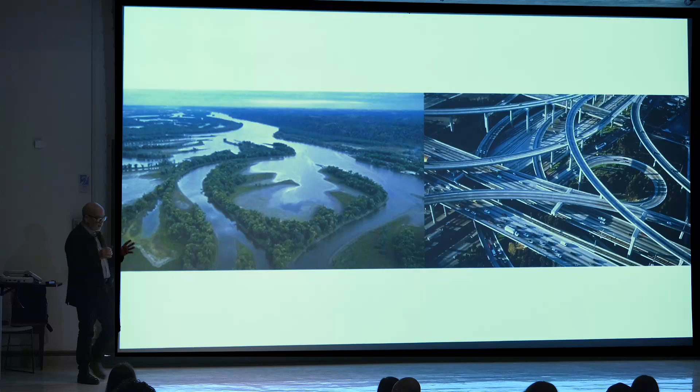I've always been interested in natural landscapes, but I find that most of our work today is less about natural landscapes and more about man-made landscapes. I lived for a bit in LA, and it was a very interesting place to experience for a number of years. But this dialectic between the natural and the man-made is something I think about with New Orleans, and when I think about its longevity over time.

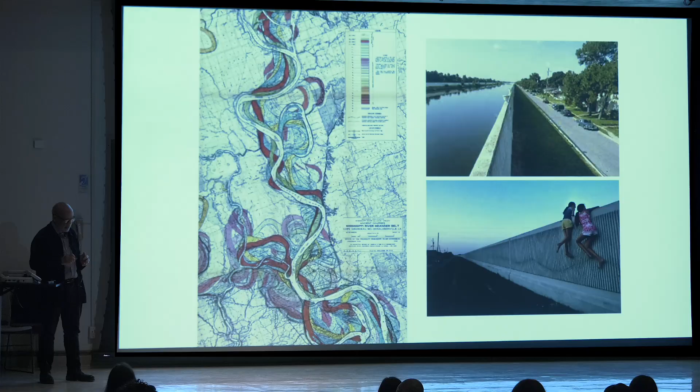New Orleans was sited precisely because of its location on the Mississippi River. And since its founding, given the tenuous relationship between the city, the river, and the Gulf Coast, we've been working quite consciously to cut ourselves off from the natural landscape. You can see in the images flood walls built by the Corps of Engineers—we've essentially walled off the city from the river, the lake, and the natural landscape. This idea of protection and refuge from the natural landscape is of interest to me.

But in addition to the consideration of landscape—I don't know if this mic is going to keep going on and off, I can speak loudly. Yeah, that works, speaking loudly. Why don't I just speak up? Is that fine in the back?

Okay, great. So again, a more personal kind of journey or set of interests. Spending time out in California meant I was able to visit a lot of the land art installations out in the West. I've always been interested in art in the landscape. I had a chance to spend the night at the Lightning Field and visit Sun Tunnels in the plateaus.

What is really powerful about this work, and what I think ties it to architecture, is that it's really about experience. Unfortunately I wasn't there when lightning struck at Lightning Field, but nonetheless the presence of that art in the landscape was incredibly powerful, as is Sun Tunnels when the sun sets or rises and you get the markings through. This idea that art and architecture is about experience is fundamental to my interest in it and the way I see the work.

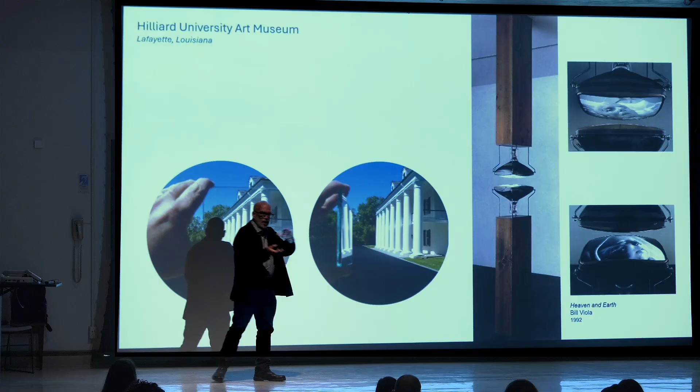Around the same time, I had visited a Bill Viola installation, and the power of that particular installation—Bill Viola's newborn on one image and his mother on her deathbed on the other. The two screens are so close that you can't see the images simultaneously; they're facing one another. Except for the fact that there's always the reflection of the other image superimposed.

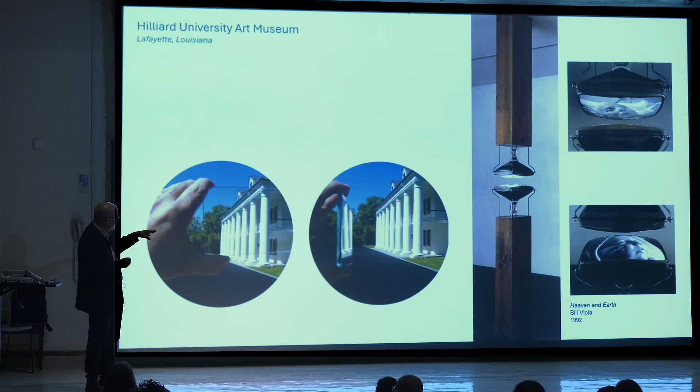This dialogue between time—he labeled it heaven and earth, I think of it as past and future, or past and present—was something we were interested in advancing in this new museum project. We were building it separate; it wasn't an addition, it was a separate art pavilion. But the entire facade, whether vision glass or spandrel glass, works to reflect the old museum, the history of the site, into the facade of the new. This dialogue between past, present, and future is of particular interest.

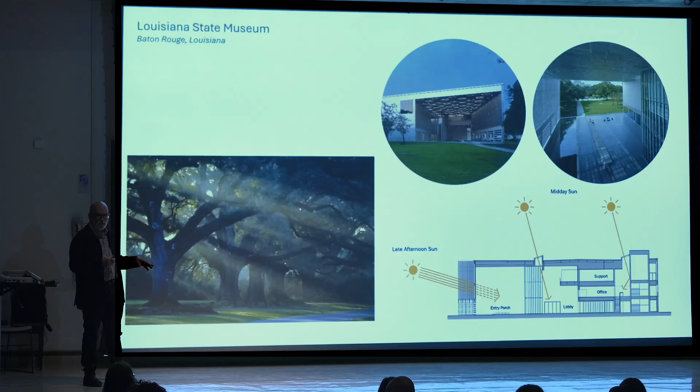The contextual, vernacular architecture of the South is also a jumping-off point—here, the way oak trees filter light across a site. We developed for the State Museum a large entry porch that's carved in rather than added onto the building, with a reflecting pool that reflects the state capitol in its north-facing window. As a porch, it's not outside, it's not inside—it's this in-between transition or threshold, but it also operates as a social space.

At 930 Poydras, we were doing our first residential apartment tower, and we were trying to determine how we could make an apartment building—which tends to be much more private, people get in elevators, go up to their floor, and go into their unit—create an opportunity for interaction between residents. So we looked at the French Quarter and its courtyard spaces shared by residents, where you'll bump into your neighbor entering, exiting, or using the space. It's a social instigator.

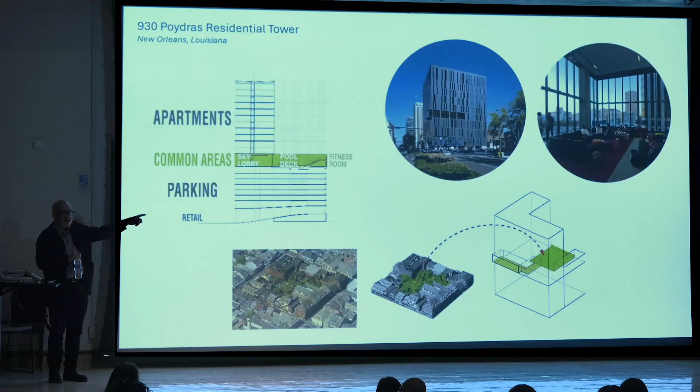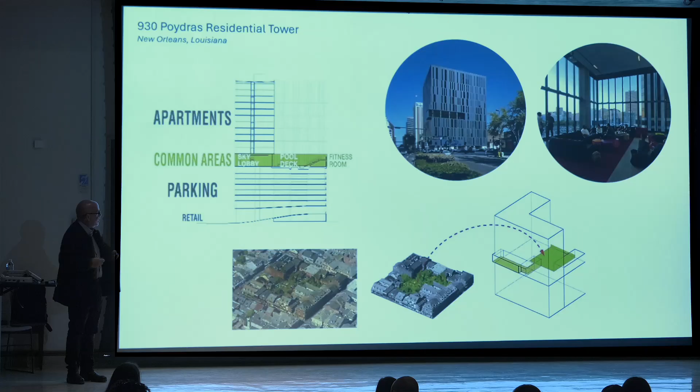Here at 930, we force people to get out of an elevator that only goes from the ground floor to the 9th floor. You get out, move through this sky lobby, and the chance of meeting your neighbor is enhanced by bumping into people as you walk through. Residents use it as an extension of their living room, for coffee and so on, and it becomes this marker in the sky, recreating the social space of a French Quarter courtyard—though it has nothing to do with its style. It's about thinking how spaces are used, and creating the set of experiences that drive the work.

I'm going to talk a little about our practice around four themes. We work to make sure they're present in all the work, but obviously the dials get turned based on the climate, the client, budgets, sustainability, and program.

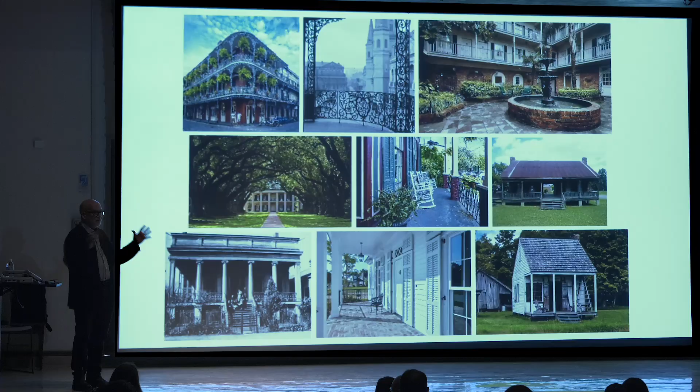I'm going to start with place. You've already seen some of these slides. We are in a set of spaces that are incredibly powerful, and I think every place has equal value to contribute—so keep your eyes open and learn from the history of a place. I love this quote by Faulkner: 'The past is never dead. In fact, it's not even past.' There's this continuity in what we do.

A friend quoted me a joke he tells about New Orleans: how many New Orleanians does it take to change a light bulb? Three. One to change the bulb, and two to reminisce about how wonderful the old bulb was.

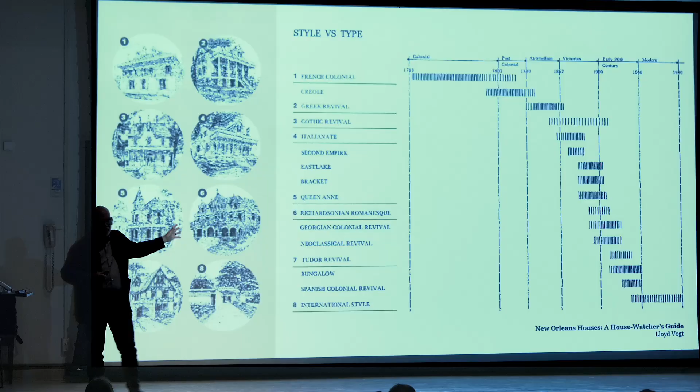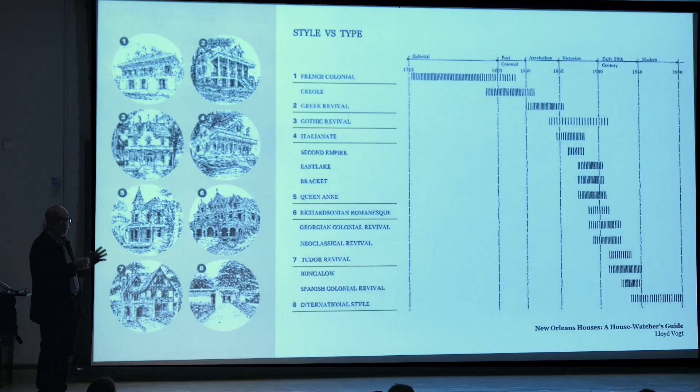So there's this sense on the part of the public that architecture in New Orleans is going to look and feel like New Orleans. Well, we think of it less about how it looks and more about how it feels and what's the experience of the place. Because styles change, types don't necessarily change. If there was a house built in the 18th century in New Orleans versus one built in the 19th century, much of it would be similar, but it would look and feel different. Styles change. So how do we fit into that continuum, working in a place?

Now, this is a hotel that we renovated, this existing building, 1920s. This was a parking lot. This is also a 1920s little garage that was built around the same time as part of it. This was a parking lot, and then we had these 19th century buildings as part of the site.

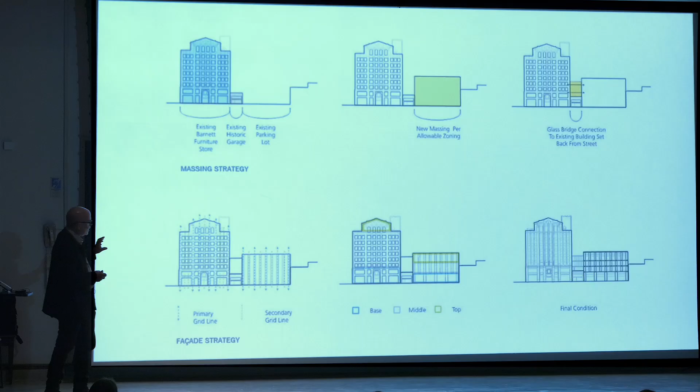So obviously we're not going to match one or the other. This is about how do you do a background building that has the quality of adding to a historic environment without replicating it. A lot of it's understanding strategies of scale, proportion, massing, how we can relate to the context without overpowering it. So you get to this wing of the building, the main check-in is here, and we have this bridge that kind of tucks behind.

In a completely different context, 12 years ago, we were invited to a competition for a museum in Greenwich, Connecticut. Here you can see it's on the I-95 corridor right at the harbor. The town of Greenwich is just up the road here.

But the context was one where the program was a major driver, right? We had a museum that wasn't just an art museum, it was an art and science museum. That had particular resonance for us, this notion that art and science in the Smithsonians are collected in different buildings, whereas in this building it was all under one roof.

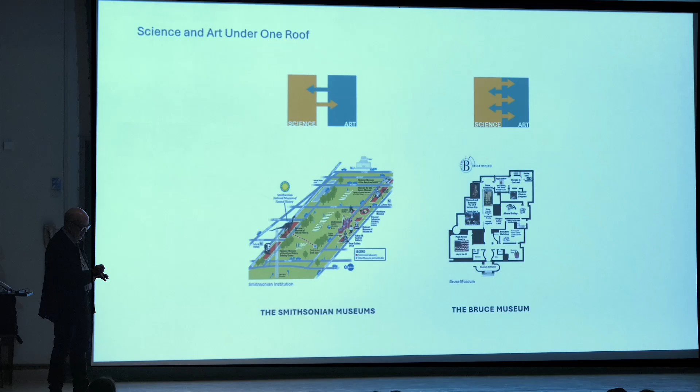When we started the project, we asked the director to tell us a little bit about the Bruce. What does the Bruce mean? He said, well, it's the only place where you can see a raccoon and a Rembrandt under the same roof. We thought that was a funny and interesting way to think about a museum.

What they're able to do is have simultaneous shows where an art show might work to supplement and build on an exhibition that's about science. So this dialogue between art and science, so that they're inseparable, was part of the project.

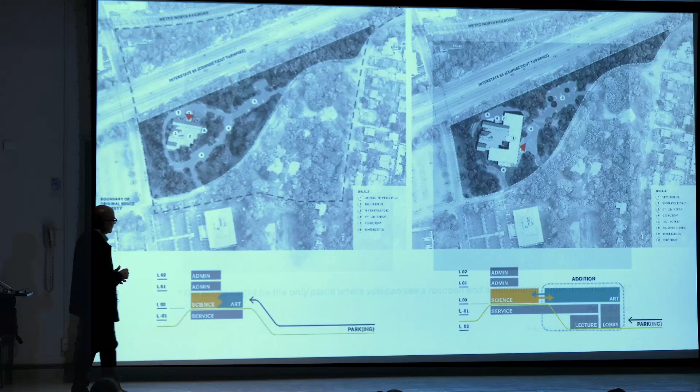The original museum was this house that was deeded to the town right around 1910, built in the 1890s. It had been expanded. The entrance was to the north on top of the hill, you can kind of see it here. The galleries were—the entrance was at the top of the hill, 25 feet above where people parked.

So it's kind of hidden away. When we expanded and doubled the size of the footprint with the new galleries and service, it naturally went out over the hillside and dropped down. So we were able to essentially, with the reworked parking, have a front door that was part of the park and part of the community.

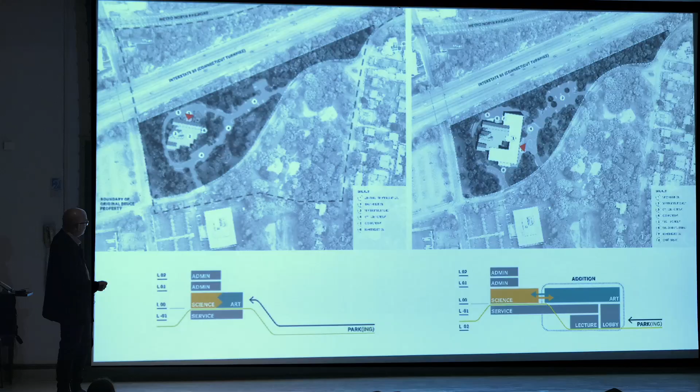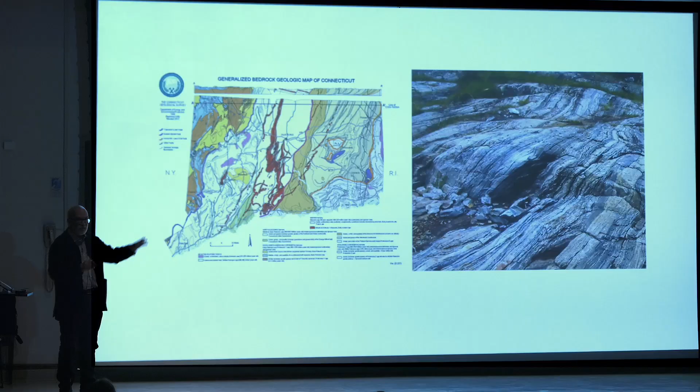We were inspired by the stone of the original house, the Second Empire sort of Victorian house, but also by the stone outcroppings on the site. This post-glacial scouring of the Connecticut landscape leaves rock outcroppings all over, and it was a really powerful condition of the site. So we were asked to think about the project in more than one way.

Stone was a theme, and we decided to develop two strategies. One, there are quarries up and down the Connecticut coast, so quarry carving—kind of subtracting in the manner of a quarry—was one option. The other was stacking, the accretion of building stone walls, and in this case lace walls were built where there was a lot of air and openness in between.

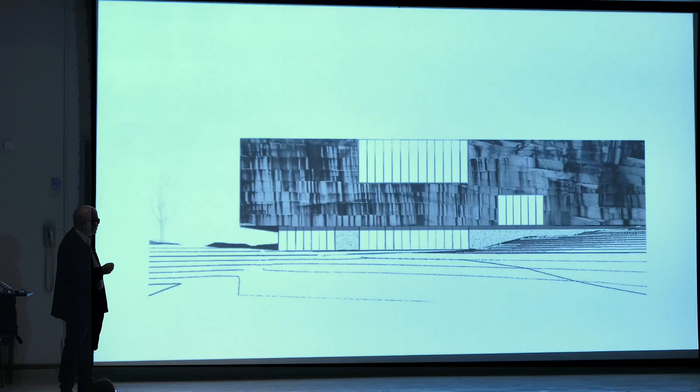So this was an operation we shared with the client, about going from quarry and then introducing lace. This is the entry sequence through the project. What happens at night is when lace goes from day to night, it becomes like a scrim.

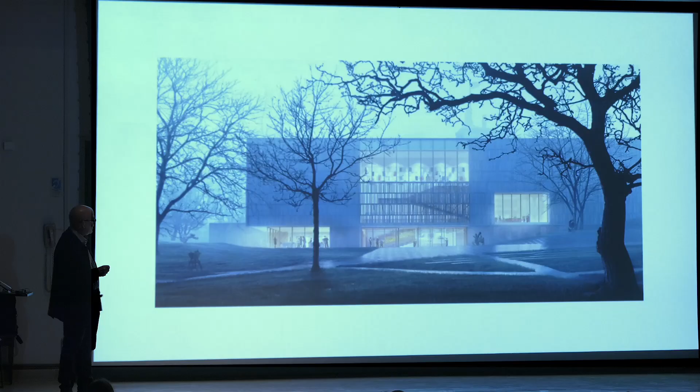And so you see through it and into it. This is the project that was nearing completion in the snow. When you're from New Orleans, you always show a snow shot if you have one, because we never get it. It was just amazing to see.

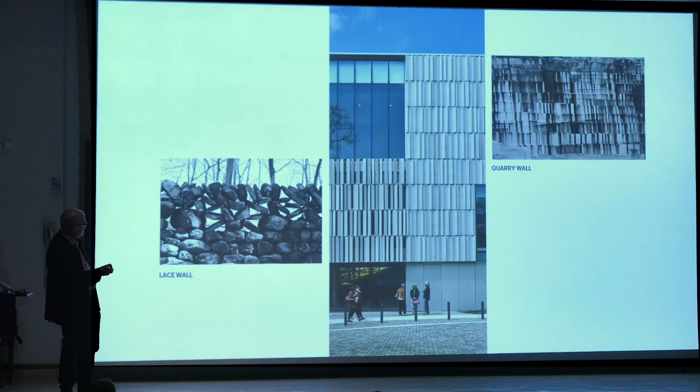But here you can kind of see the articulation. We developed a strategy where the precast wall of the quarry breaks apart and becomes a set of sticks that run in front of the curtain wall here, representing lace. But at night, as I said, it sort of transforms into something different. At night, you also see through the building.

And here, the design proposal we had captured a courtyard between the original building, or the original museum, and our addition. And so it becomes this diorama, this kind of site relic that we pull through and have an opportunity to interpret as a captured landscape.

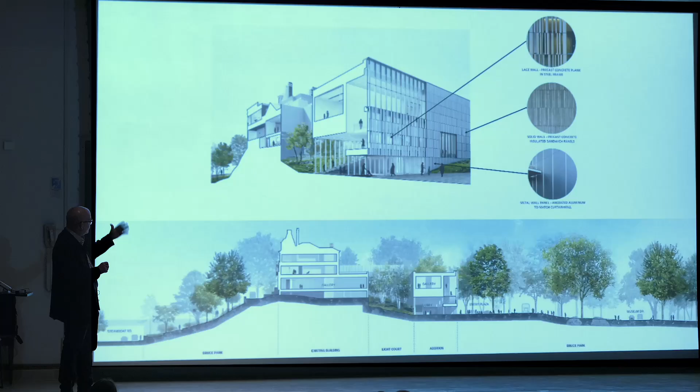We worked with Reed Hilderbrand out of Cambridge, terrific landscape architects that helped us realize this. And when you look on the inside, you can kind of see the corten steps and the stone outcroppings and the aspens that'll grow and become this intense landscape. But also a landscape that you're in between. So you have a landscape on one side, landscape on the outside.

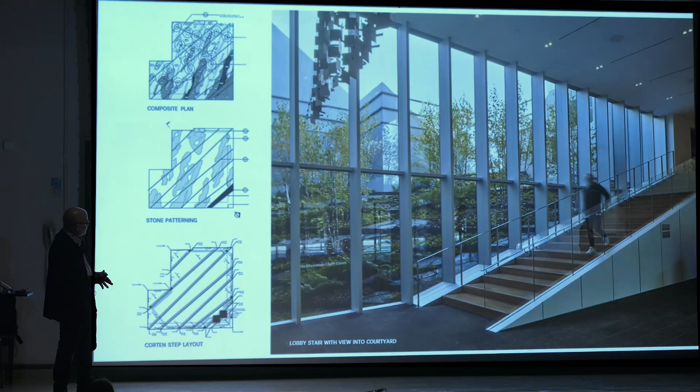This space of gathering almost feels like it's an outside and inside space. The stair that we developed works its way up following the slope of the courtyard, which was what we found on the site at the edge of the hill.

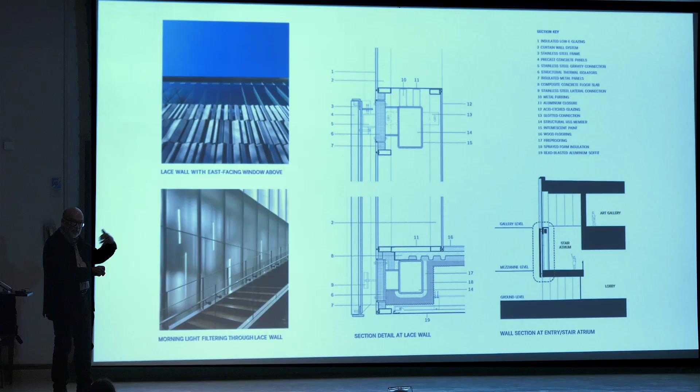And then on the outside, this lace wall starts to operate in a way where it literally allows light to hit the frosted glass on the inside of the stair and become a light fixture that kind of dances over the course of the day. So here's the approach from the park and how we manipulated the precast to achieve that effect.

So when we talk about performance and resilience, we talk as much about building performance, but also this idea of social resilience and sustainability. When we started the practice, it's one of the first projects I worked on. I was trained at the time that we were very focused on climate. It was just after the first Earth Days.

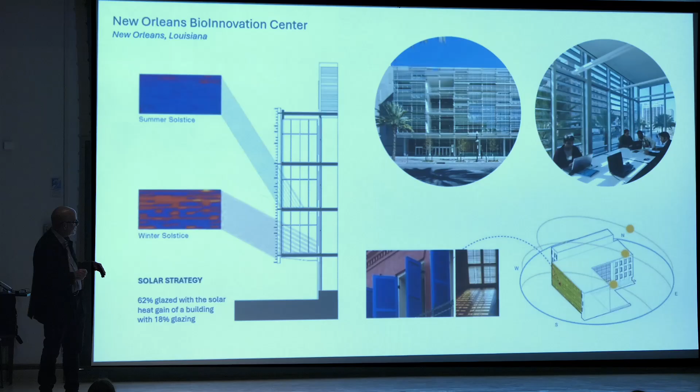But what we were doing then was essentially intuitive design that made sense given certain climatic strategies. What we do now is we use resources, use evidence-based design. I'm sure you're getting this in school right now. Ways in which you can, and for us, increase the performance of our buildings by doing the kind of analysis and research and modeling of the work early in the design phases. And so here, the strategy of using a set of shutters is similar to the way in which shutters operate as fins that protect and shade the glass, allowing us to be much more intentional about decision making on projects.

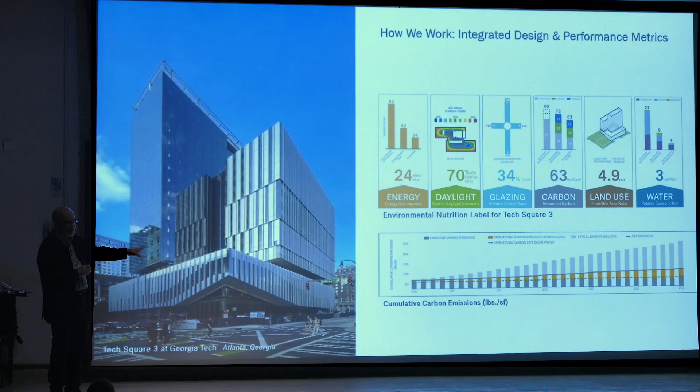Z. Smith, our Director of Sustainability, has developed this nutrition label for our buildings. This is done early in the process. He assesses things like energy, daylight, glazing, carbon, land use, and water. And so we work to understand how those are improving in measure so that we can deal with this climate crisis in a positive way.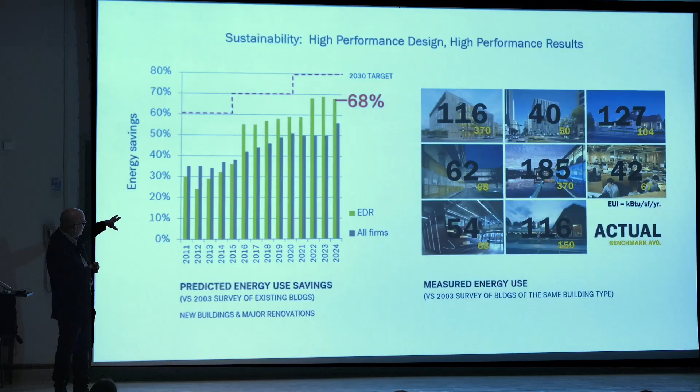So our buildings are performing. We've done a lot of work measuring them early, but then measuring them later. And so we go back and do post-occupancy reviews of the projects, and those have been foundational in helping us. You can kind of see the green line. When we started reporting for 2030, we were down low. As we started to do this research, we were able to significantly increase it.

And so we fund a research fellowship in the studio where we hire two fellows a year, one for the summer and one for the year, to focus on different interests of the firm, of the practice. Building performance, resilience, you kind of see them through here. Those fellows are not working on projects, they're not billable to things, but they are working in the studio, doing their research work, and giving talks to the entire studio and assisting people in the work and the projects. And it's been huge in the way in which we've transformed the practice.

So from the first work that we did, establishing an action plan, to being able to then incorporate it in buildings has been critical. And I think it's one of the unique things in the practice, but one that has been a huge investment that pays off significantly.

This is a project that we did in downtown Charlottesville. Charlottesville has a pedestrian mall, kind of like Denver's, but a smaller scale, with 2- and 3-story buildings on the mall that then, as you get into the city, begins to step up. The hillside rises, and the scale of buildings starts to rise outside. So there was a zoning code that we had to conform to in terms of height.

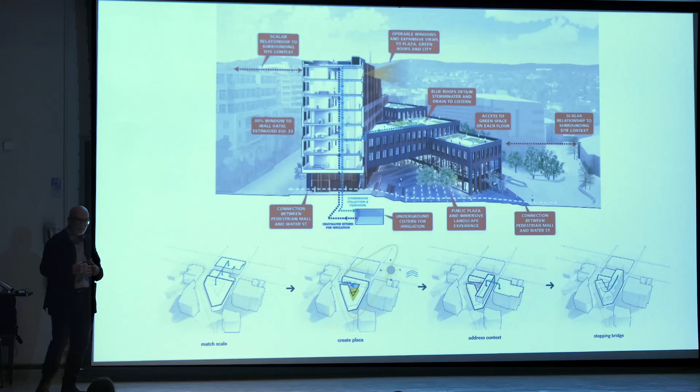Our strategy started by acknowledging the height of the district and then the adjacent context, to develop a step form that takes advantage of outdoor spaces on rooftops and collecting water, and provides great spaces for office users. This has yielded a project that's LEED Platinum, 99% of the rain harvested, and significant energy performance.

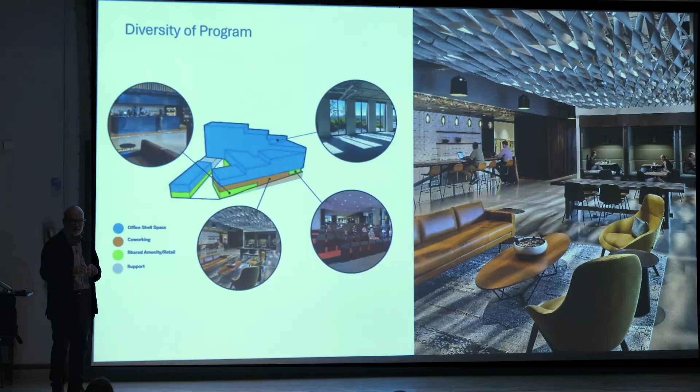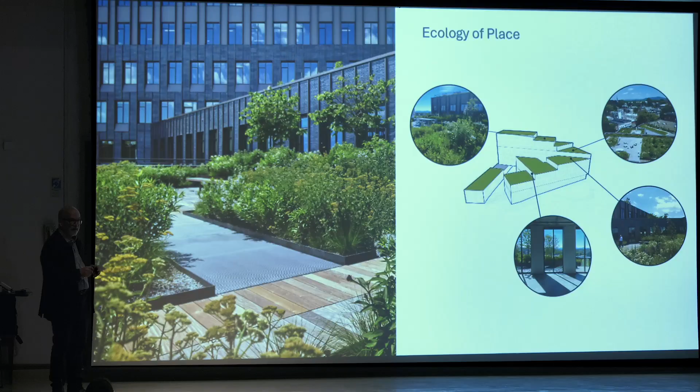But more than that, it's really the diversity of the program that contributes. It's a chance to really build community. We worked with the developer to conceptualize opportunities for different program elements to be distributed through the project. This ecology aspect of rooftop gardens, and what they provide in terms of health and welfare for the users of the building, and then connections throughout.

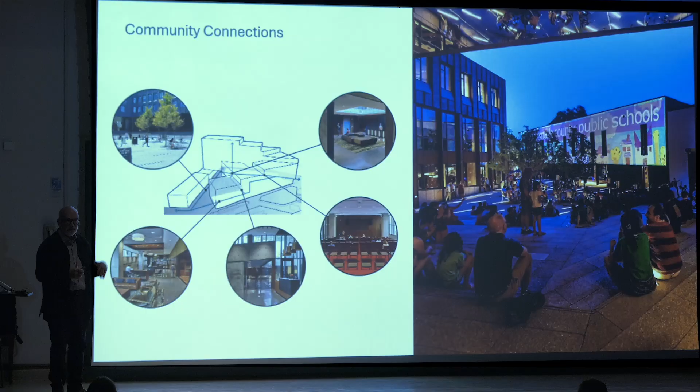So we carved a courtyard that gives opportunities for events to happen and for users to take advantage of. And here's the co-working space that's on the ground floor.

So I understand some of you may have been to the Thaden School, that y'all have done some drives and used it as an opportunity to go visit. This is a project that we did with Marlon Blackwell Architects and Andropogon as landscape architect. The collaboration between the three of us, I think, was critical to the outcome.

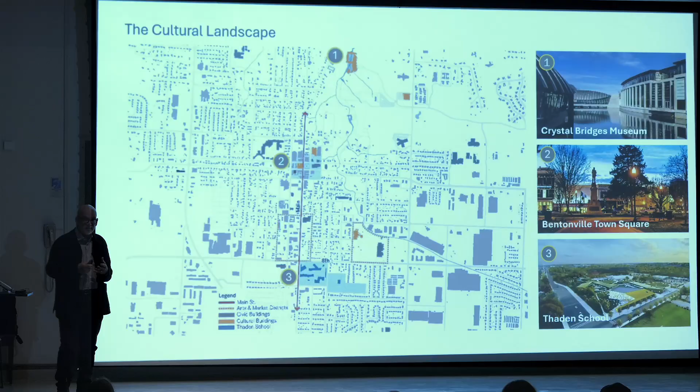Two different architectural perspectives, one based in the place, one outside of the place, and then a landscape architect working with us in tandem. Marlon Blackwell knows the Ozarks well, so the whole natural and agricultural landscape was something we were introduced to, but also the cultural landscape and understanding the relationship the school would play to the town. The school had been the site of the previous county fair.

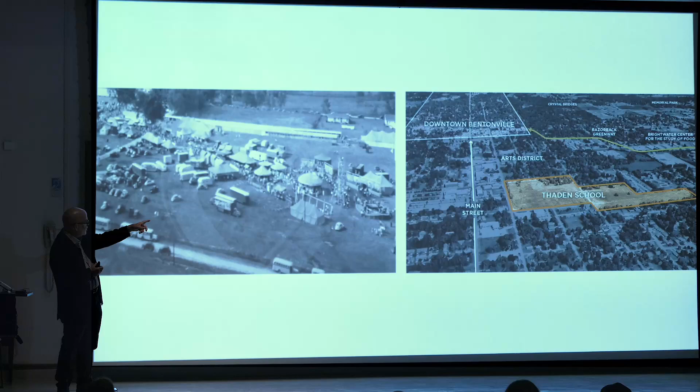You can see here the Arts District, Main Street running up to downtown. When we started the project, there was no program, and this is something that, if you're doing a thesis, you have the opportunity to develop your own ideas about what you want to explore from a programmatic standpoint. But when you get into practice, you might find that part of the skills you're learning are how you can bring to the table a whole set of ideas that can contribute to how the project becomes, as it relates to program.

Clayton Marsh was the head of school. He was the only person hired when they hired the architectural team. But he had spent enough time in the Ozarks to think about the pedagogy of the school, and it really revolves around learning by doing.

So he saw a bike culture in the place that he thought was really important to plug into—agriculture and food production, and art and movie making. So he themed it as meals, wheels, and reels, where each of those could contribute to a holistic education. It's middle school and high school, but it was really about experience and learning by doing.

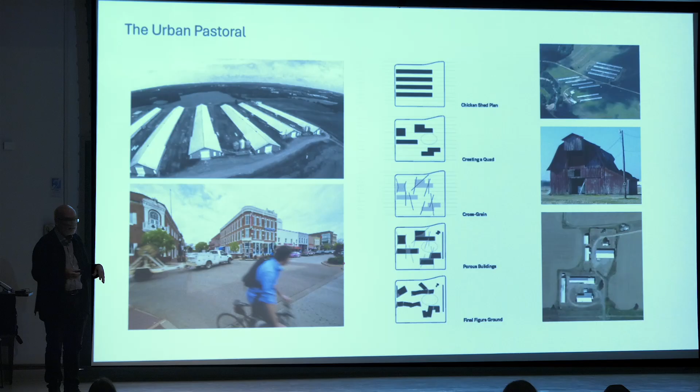So this in-between was of great interest. This is our final master plan: four buildings around the educational program of the school, a bike barn for sports, and a pump track.

We looked at different strategies for incorporating aspects of the site that were critical. The outdoor space—Clayton was very clear he didn't want a school completely shut off from nature, and that students should know when it's raining. They move from here to here to here over the course of the day.

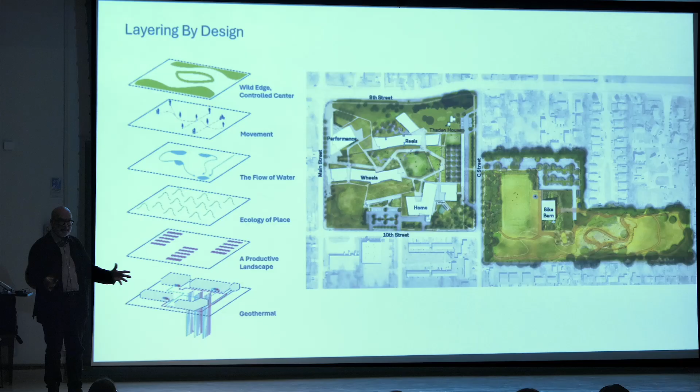They're constantly moving across the site, taking advantage of it to create opportunities for productive landscapes, using the landscape and campus as a teaching tool. Students are constantly exploring the outdoors and the site rather than simply being in classrooms, and that was critical.

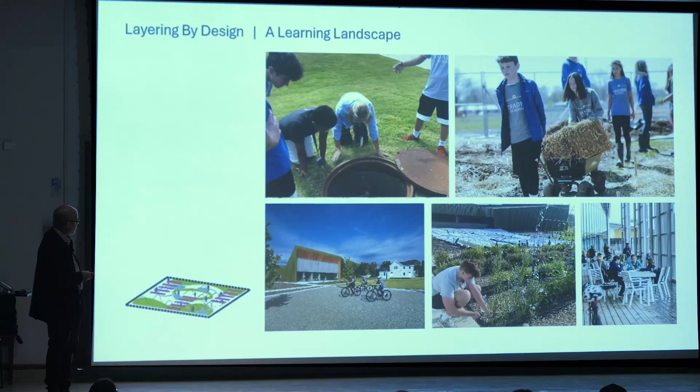So I'm going to touch a little bit on the home building, which we did as an early phase of the project. You can begin to see the obvious precedents of farm buildings and barns. Here are some different precedents in Arkansas—barns with heavy timber.

Here, the idea that we would develop a dining room—this is like Hogwarts kind of inspiration. But the idea is that there are always connections from inside to out.

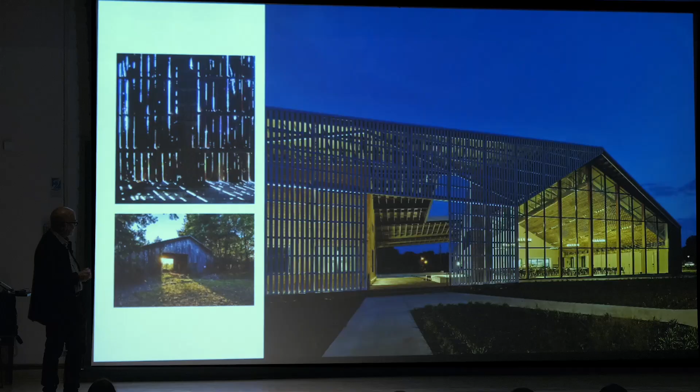Students start their day here and end it there. Here you can see this idea of incorporating a nomenclature that might allude to barns without necessarily being a barn—dog trots, porches, landscapes, and connections.

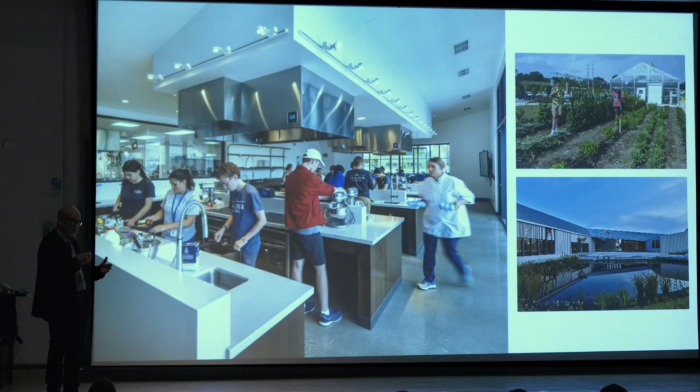So the productive landscape moves into a teaching classroom for the students, right next to the production kitchen for lunch. This learning by doing operates at multiple levels.

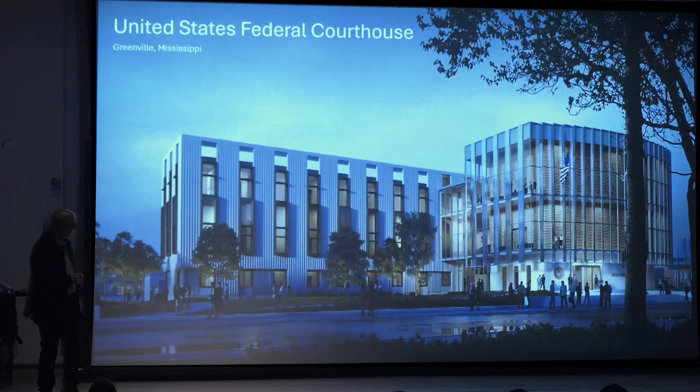And so equity—for us, making sure that we are designing and contributing to the broader society we're working for has always been a critical aspect of the practice.

This is a project we're doing for the government, nearing completion in Greenville, Mississippi. We're partnered with Duvall Decker out of Jackson on this. Roy and I have been friends and colleagues for years and looked for opportunities to work together, and this came along—we said, let's do this together.

Greenville was an incredibly prosperous place before the Civil War, but that prosperity was limited to a small segment of the community, primarily white, and it was built on the backs of slaves.

When we began to think about the issues the community had faced over centuries, and the idea that we would build a courthouse in this place that represented justice for the community, it was impossible to think of that independently of the history of the place and the nature of the community. Now, a little bit of history.

When the federal government initiated building the federal courts, the first federal buildings built in what then were states that became part of the United States—in 1789, Thomas Jefferson envisioned a classical Greek revival, hearkening back to the Greeks, as a means to create a significant federal presence in a community that was probably nothing more than a collection of scattered wooden shacks.

Today, courthouses are really complicated programs that include all sorts of uses. The marshals, clerks of court, magistrates - the amount of space associated with the court functions completely subsumes the courts as an entity. But here we said, well, how can we make them visible?

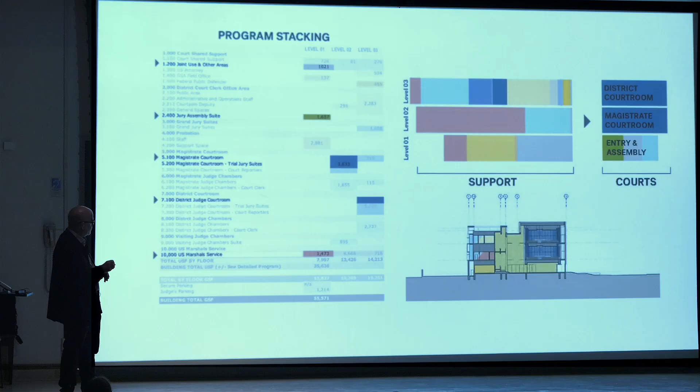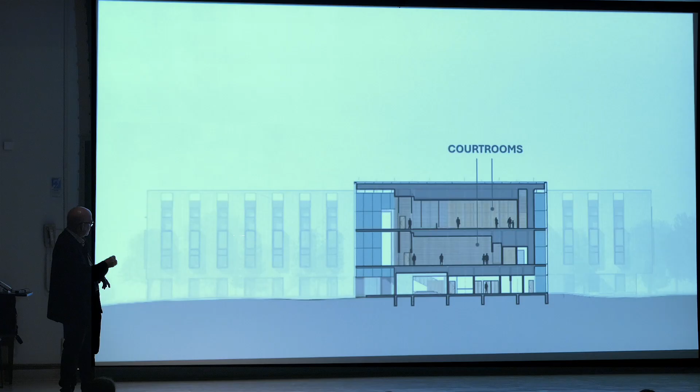How can we make it clear that this is a courthouse, courtroom? So we pulled them out separately. We developed a bar building behind that houses all of the support functions of the court. And in this courtroom block, we have entry, jury assembly, and the two courtrooms, the magistrate and the district courtroom, stacked on top of each other.

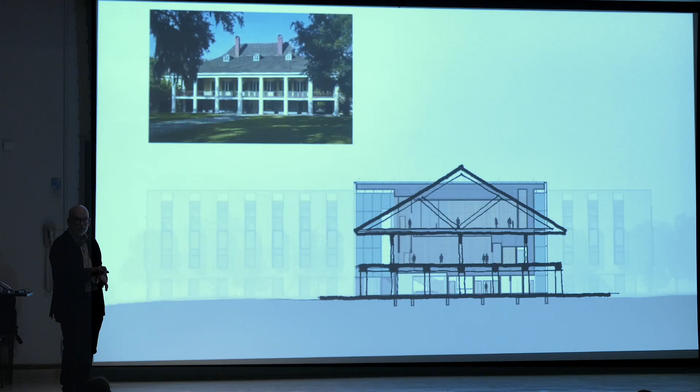And it has antecedents - this kind of raised French plantation model, with galleries to the outside, the space contained on the inside, and support really below. The living is all raised.

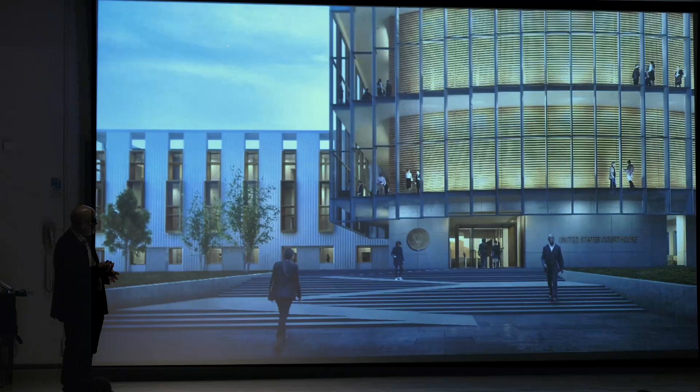This gave us an opportunity to think about the interstitial space between the curtain wall - modern security, modern technology - rather than outdoor space. The curtain wall between it and the courtroom, which we rendered in wood. The wood is also a shutter, so that the courtroom inside gets daylight and a view out while still being secure.

So here's the entry - you come in, jury assembly below. Here's the courts above, and you can see here, behind the body of the courtroom, the support spaces that function.

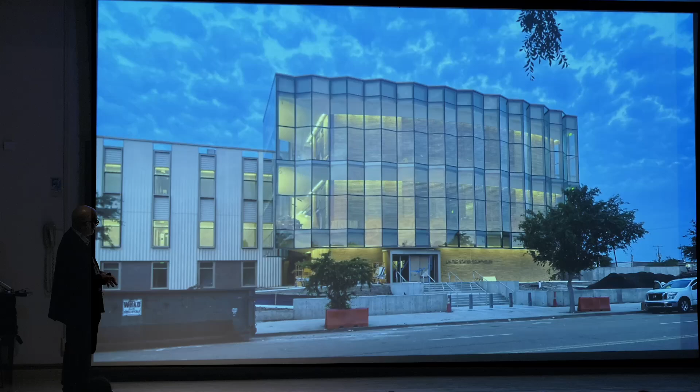So this project will be complete at the end of the year. Here you can see it nearing the end of construction, all on the site, operating almost as a lantern for justice.

So the last project I'm going to share and touch on goes all the way back 20 years. We're acknowledging the 20-year anniversary of Katrina this year - last month, two months ago.

And so this issue of catastrophe and the impact catastrophe has on a community - Hans took me to go see the memorial in downtown Oklahoma City, which I discovered acknowledges a disaster 30 years ago. This question of memory - how we think about significant acts, how we respond to them as a community - was something we reflected on significantly this year as we looked at 20 years since Katrina.

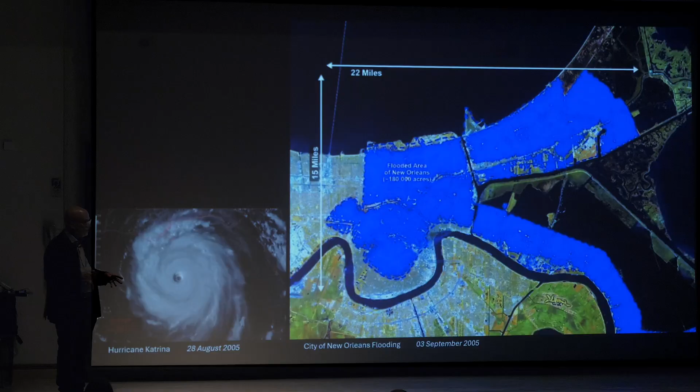Katrina almost destroyed our city. So here you can see the size of Katrina as it approached, but also the flooded area of New Orleans. Now, I did an overlay of this onto the District of Columbia - it would exceed its size by about 50%. So it's hard to understand exactly how big this is, but 80% of the city was underwater in some fashion.

Anybody who made a decision to stay in that community was fully invested, because we all had to evacuate. All of us were out of the city for two to three months before anyone was allowed back in.

And so there were a set of conversations and planning exercises that incorporated the entire community. This dialogue of making sure we as designers understood the desires and needs of the community, while thinking creatively about how to solve those issues in a very complicated set of circumstances, was key. This is Alan, by the way, for those who may remember him - central to many of those conversations.

One of the projects that emerged out of it was a library and a community center that we did in the Broadmoor area. Now, that area - you can see on this map how much water.

New Orleans is a bowl: high levee at the river, high levee at the lake, and then all of the ground kind of recedes, with the lowest area being what was swamp and was pumped out in a reclamation project, continuing to subside as we've pumped it out. Those levee walls I showed you earlier are fingers of the lake that come in where the pumps were originally located at the turn of the century. Broadmoor is down here - another low spot.

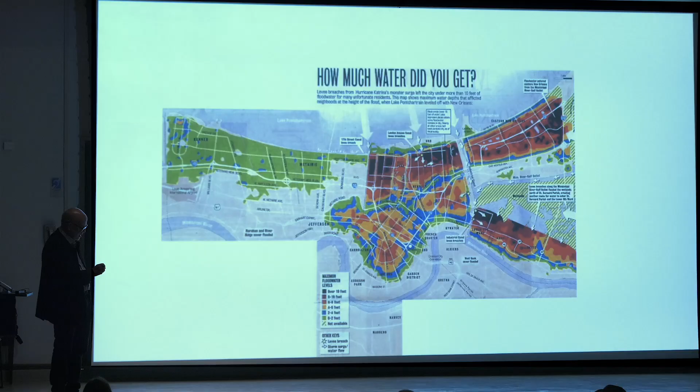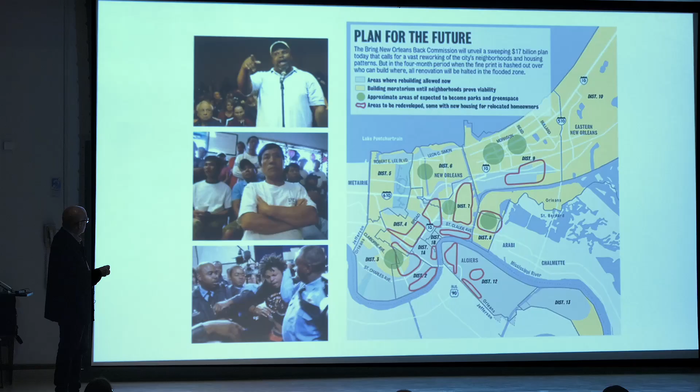It got roundly criticized by the community. In fact, Broadmoor organized with the support of the Kennedy School and others to rally to save Broadmoor. And one of the first projects that FEMA funded there was a community center and a library.

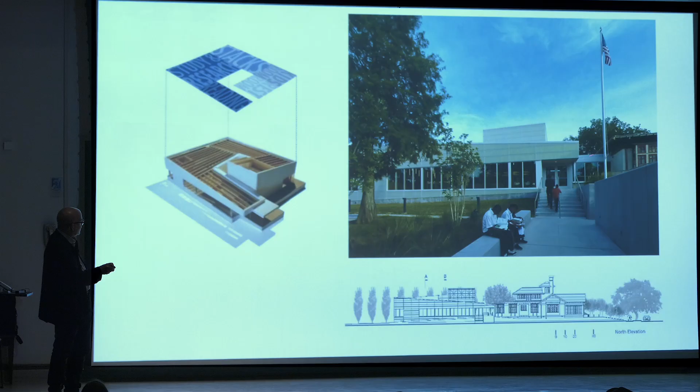What we were interested in doing was, again, resilience and sustainability. We developed a plan that's essentially a spiral with a pinwheel structure that wraps around, that organizes the program underneath it. And that spiral takes all the water and brings it to one location where a scupper drops it down and leads out to a rain garden in the front.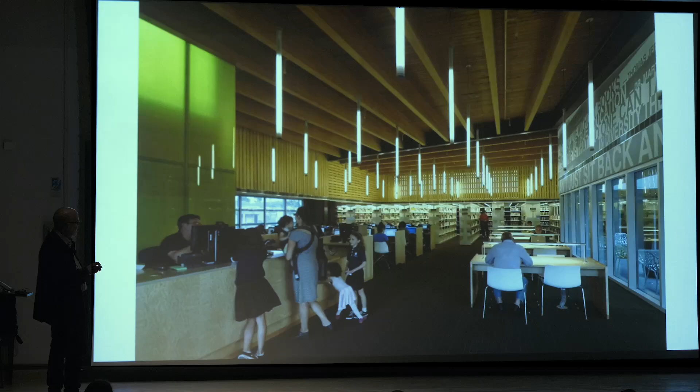Here you can see it at night, the transparency that this north face gives to the community. Here's the interior, all wood, steel structure where the pinwheels occur, but we developed a strategy to establish this datum with all the glazing protected depending upon its construction. And the green dot map, which was a huge problem for the community, became something for us to build on.

The client told us early, the community organizer we were working with, that she planned to name the cafe the Green Dot Cafe, just to thumb her nose at the previous administration. As a result, we developed a rain screen, a metal panel wall system where we used a waterproofing behind that was lime green just to do the same. So the building is thousands and thousands of green dots, which we thought was amusing.

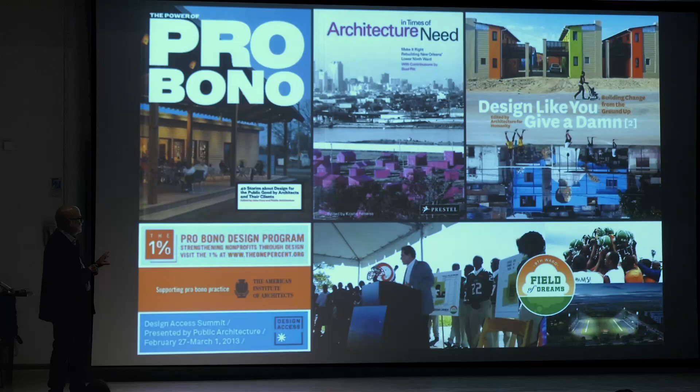To wrap up, as we've invested more in the community, we've spent a lot more time. We've always done pro bono work, but we've been much more intentional about it.

A little over 10 years ago, we started a day of service. We had always done things in the community, contributed our time, whether it was painting houses for the Preservation Resource Center or contributing in a lot of ways. It struck us that there's a unique skill set that we as architects can provide, helping clients solve issues or problems that only an architect can solve.

So we established a day of service, and we advertise for proposals from nonprofits around the community. We usually get a dozen or so. As an office, we review them, we vote on them as a group, and we shortlist maybe 4 or 5 projects that we will focus on.

And that day of service is one day of an architect's time to help you solve your problem. But it's a lot more than a day, because there's a whole planning exercise that has to happen before. There's meeting with the nonprofits, developing strategies for how we can really leverage that one day. There's the day, but then there's the follow-up.

I show this, though, because in lieu of the way we used to work, as principals being asked to do pro bono work and us finding staff to do it, what we've done as a firm is established that young architects, not yet project architects or project managers, become team leaders for the teams. It's a chance for them to take over a project and really leverage a growth curve by having them meet with the clients, have the communication, and having us use it as an opportunity for leadership development. And it's been hugely successful.

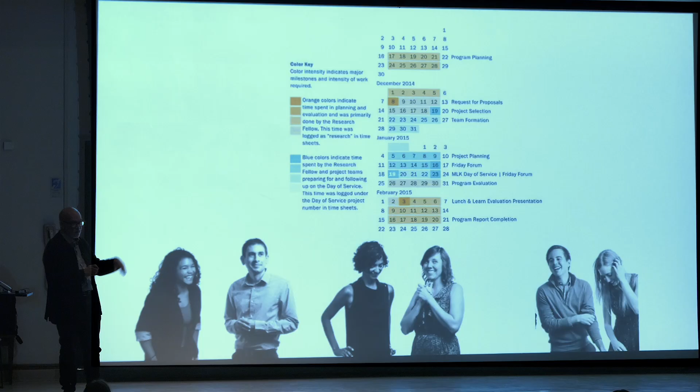It's, I think, one of the best things we do at a lot of levels. So it's allowed us to contribute to the community. The community comes in, we get to know them better. Every year we've got, as I said, 4 or 5 different groups coming in. As a result, we've developed skills in a younger generation that sometimes take longer to build if you're working under leadership. In this case, you flip the script, and we're working for them.

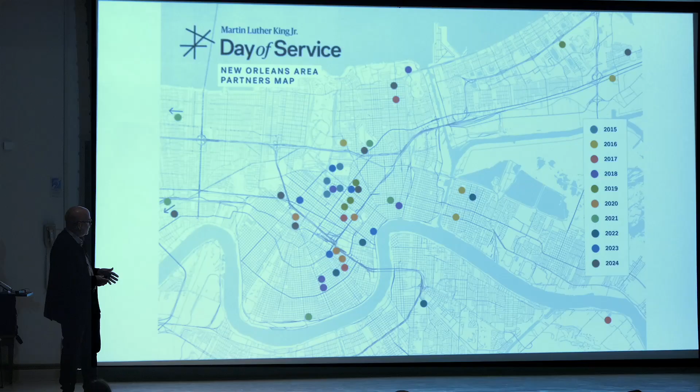So to close, Allen, my partner Allen Eskew, always saw architectural practice as being much more than just doing projects. He expected us, every year at annual reviews, to sit down and tell him what we were doing in the community. Are we serving the AIA or a professional association? Are we a member of our neighborhood association? Are we serving on the board of a cultural facility? There was an expectation that everyone, not just principals, everyone in the studio would do service at some level. We started the local chapter of NOMA out of our studio. Jose Alvarez, now our principal, started it.

Project Pipeline has been an initiative we've been investing in. So this idea that as architects, we're going to do projects, and those are really important, but those are just one piece of the puzzle. Really finding ways that you can contribute, invest, spend time in the community, wherever it is, wherever you end up, to really understand clients, their needs, and the community that you serve is really important. So I'll just leave you with that, and thank you.